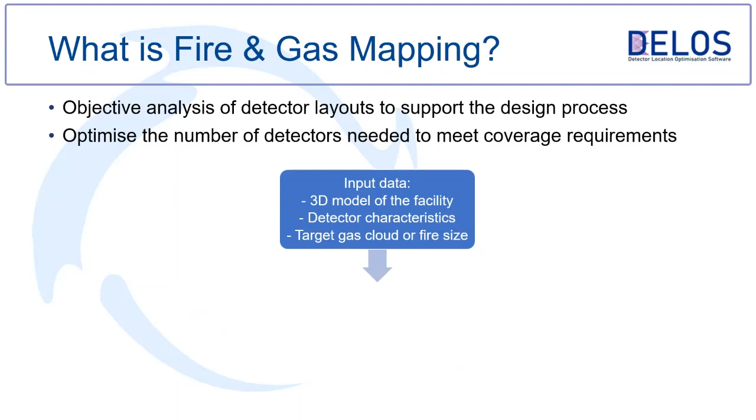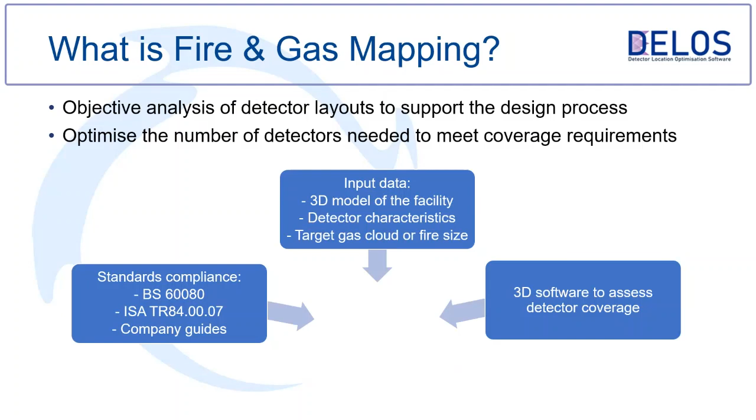In order to achieve that, there are components that need to come together. The first component obviously is the input data, which is your 3D model, detector characteristics, and also the fire or gas target that you want to detect. And then, for any compliance, you need a standard or guide for regulatory compliance. And then obviously you will need a 3D software which will do the work, and at the end of the day, have an informed design.

So that takes us to our software, DELOS, which is an acronym for Detector Location Optimization Software. It's something that we started in 2013 in response to client requirements. We'd been approached by clients to do 3D mapping for their platforms, and at that time there was limited suitable product in the market, so we decided to develop the tool.

It was designed to model fire and gas detection within a 3D geometry and calculate the output coverage statistics for each area. From 2013 onward, we have deployed it on several projects, both onshore and offshore, and as we gained experience, the software was updated to reflect that. In 2020, given the advances in technology, we upgraded the software, increasing its capability and features and improving the user interface. It has been available for purchase since 2021.

So the upgrade has taken into account previous experience from a wide range of projects that we've carried out, and also feedback from both the consultants using the software and the customers we work with. At the end of the day, what you have is software which is very quick to get started, very easy and intuitive to use, and also efficient and practical.

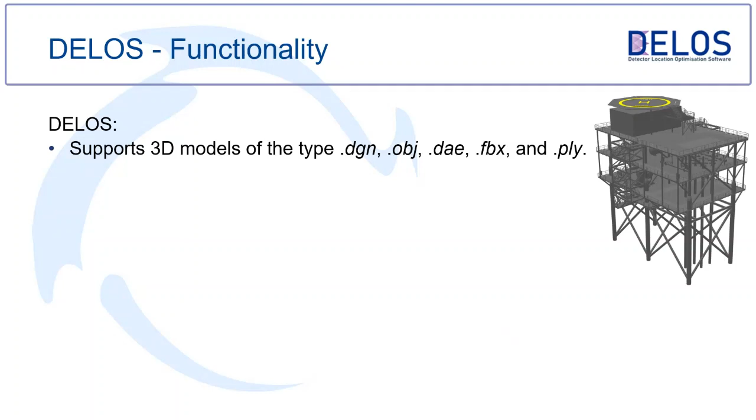The software supports different 3D model types, including DGN, DAE, and so on, and it enables different detectors to be modeled: flame detectors, point detectors, line of sight. The good thing is that with some software, you need a different file for flame detection and a different file for point gas detection. With this one, you can put all your detectors in one file, turn off flame detectors and do your gas detection analysis, then turn off gas detection, turn flame detection back on and do your flame detection analysis. So it's better that way.

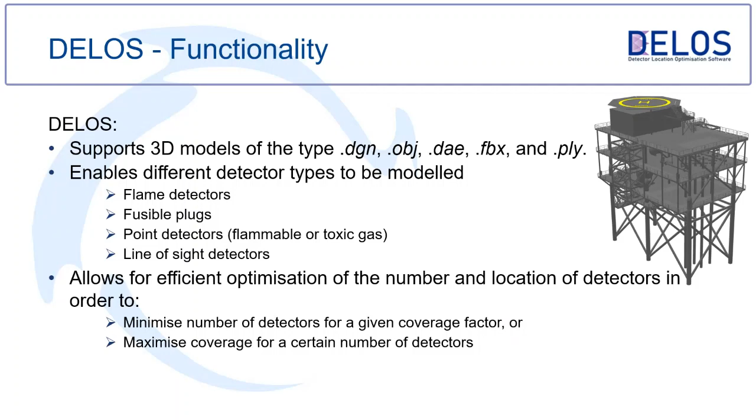At the end of the day, what the end user really wants is software that maximizes the coverage for a certain number of detectors and ensures you use the appropriate number of detectors. You don't want to overpopulate your platform with unnecessary detectors. The main features of the software are on the screen, but I'll pick a few of them to elaborate on.

One very important one from our point of view is live 3D rendering. Traditionally, when you place a detector, you wouldn't know whether the location is optimal. You have to run the model and check, or move it a bit and run it again. With live 3D rendering, you can see on the fly. You place a detector, turn on the obstructed view, which shows what the detector sees with all the obstructions in place, and as you move the detector around, it tells you whether the coverage is optimal or better than the previous location. That helps reduce the number of reruns, especially for a complex model.

Also, we have customizable detector properties. It allows you to customize your detectors depending on your criteria, and to have multiple detectors from different vendors, so you can run your model using those different detectors and see which one gives better coverage. Sometimes the client won't have a particular detector in mind, so you can try different ones and choose the best.

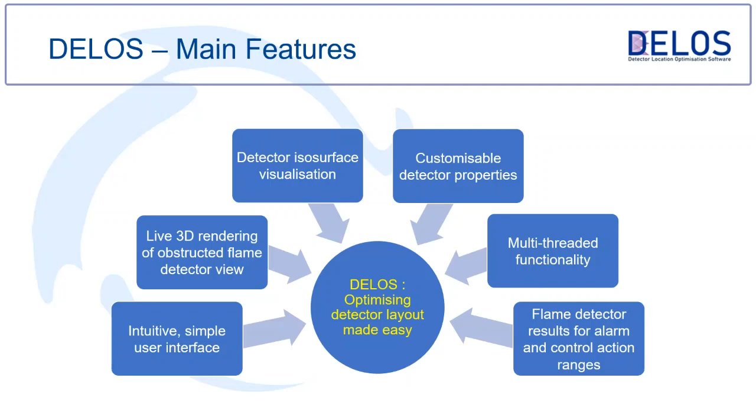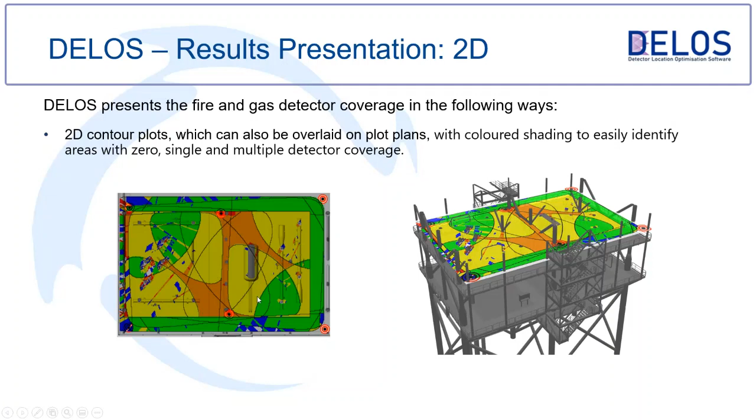And what you end up having, in terms of results, is you can have 2D results in contours like this, which show you the coverage provided by each detector. So this one is the coverage for alarm, and then there is a coverage for control action, and then the interaction between different detectors as well.

And also you can have your results in 3D on an ISO surface, which shows you whether you have single detector coverage, multiple detector coverage, or zero detector coverage. And obviously there is detailed statistics reporting either for your area of interest or for individual detectors. You can see how each individual detector is contributing towards the coverage, and you can see the overall coverage of your area of interest.

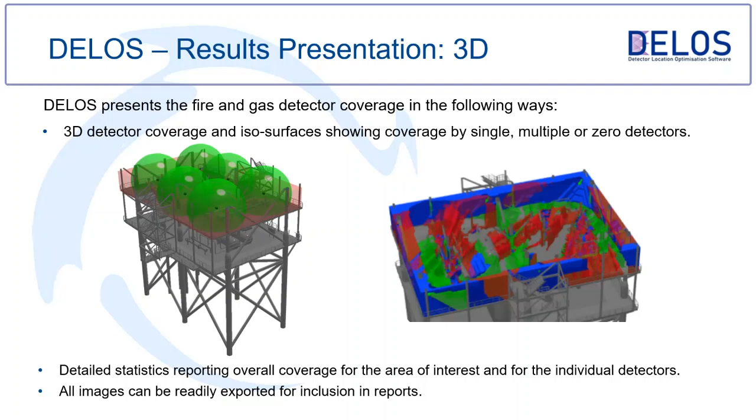And then all the images can be readily exported. The statistics and the images can all be readily exported to your reports. That is the end of this brief presentation from me.

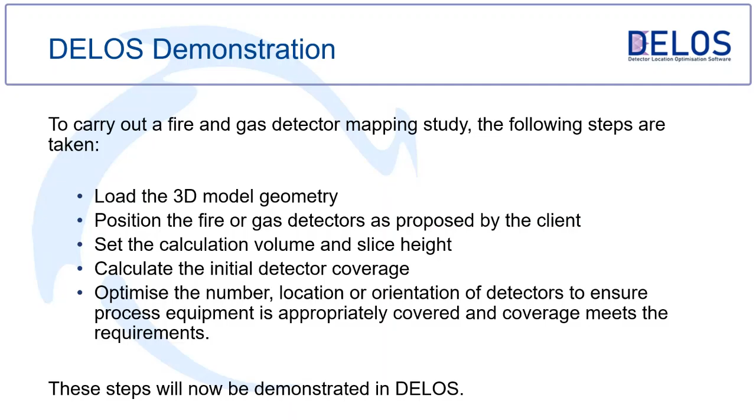So now for the next 20 minutes or so, I'm going to run through a live demonstration and show how easily DELOS can be set up for fire and gas mapping scenarios. So I'm just going to share my screen, and hopefully everyone can see my screen with the DELOS app open. Yes, you can see. Okay, good.

So first of all, I'm going to load a geometry. This is done by selecting Load Geometry from the File menu at the top and navigating to the 3D model that you want to use. As mentioned earlier, DELOS can load several different file types. For this webinar, we're going to look at an offshore platform.

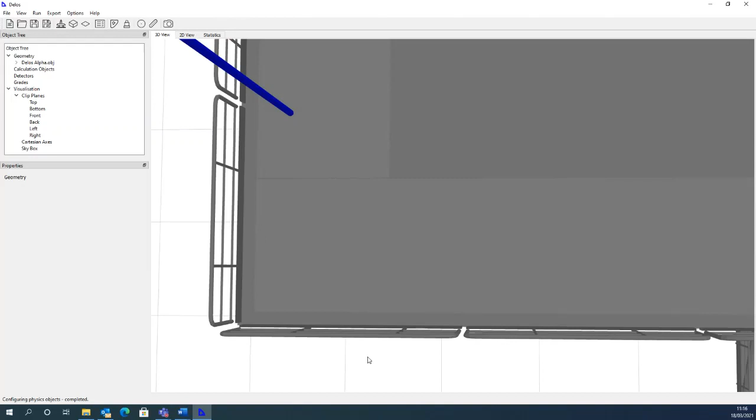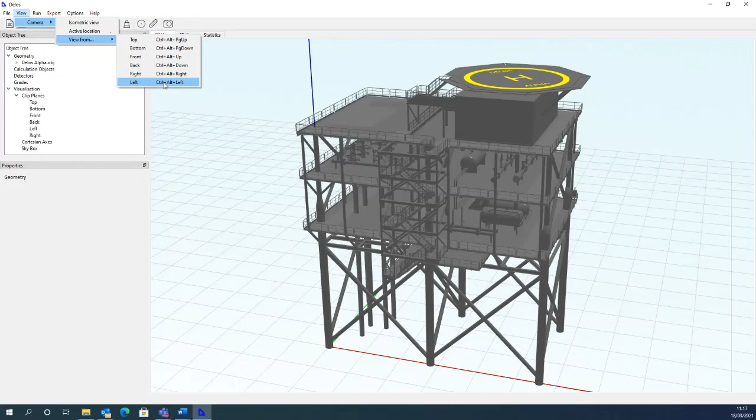There it is. It's very easy to navigate around the model in DELOS. You can zoom in and out using the scroll button on your mouse, and you can orbit around the model using the central mouse button. The axis lines indicate the origin point of the 3D model, in this case the jacket leg here on the left. There are also viewing options in the View menu at the top, and you can select the camera angle that you would like to view from. There's some options here. This can be really useful if you get disorientated when looking at a large model. It just brings you back to a point that you're familiar with.

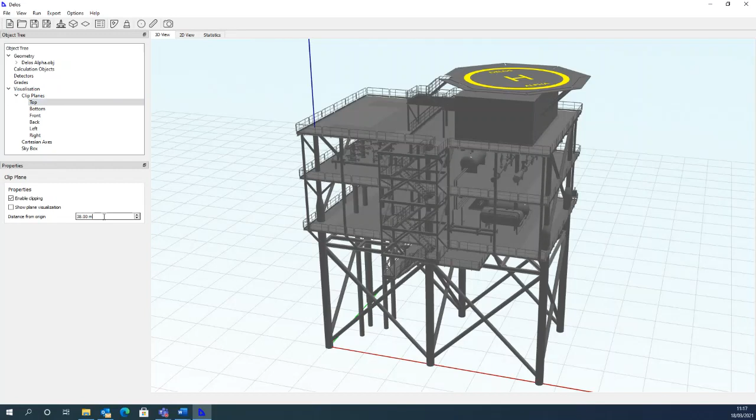The fire and gas detection provided on each platform deck would normally be assessed separately. So if we want to look at the main deck, it's very easy to clip the model using the visualization tool here on the left. By using the top clipping plane, I can incrementally clip away the top deck and navigate to the deck I'm interested in. And there's the main deck.

To increase the visibility, if you have a very congested platform, or if you're only looking at part of a deck, it can be helpful to clip away from the sides as well. But sometimes it's useful to keep structural features such as the stairwells here, just to aid navigation around the model. Using the clipping plane doesn't remove the geometry from the physics engine, it's just purely to help with the visualization.

So now we can have a look at the detectors. If I select Detectors in the object tree on the left, it opens the detector properties below. Different flame and gas detector types can be specified within DELOS, with properties such as the field of view and the range modified to suit the particular detector. So there are a couple of default styles already set up. I'll just give this one a name.

And then looking at the main deck, which is open between the well bay and the process area, forming one fire zone, I'm going to start with 2 flame detectors. So I can just zoom into my model, and then if I click on the support beam over here where I'd like my flame detector to be located, and then choose the icon in the top toolbar, there's my flame detector added in that location on the model.

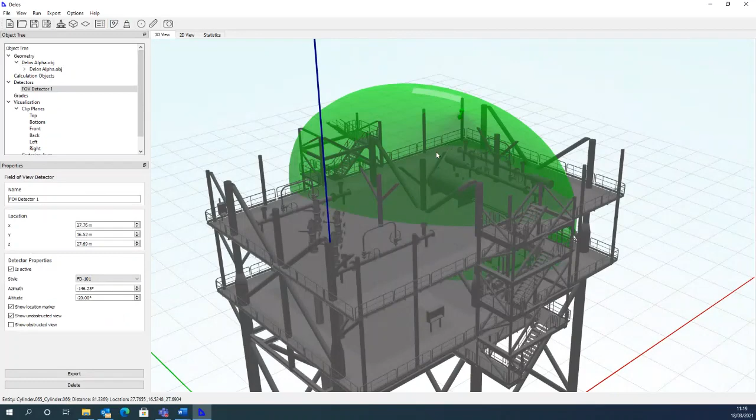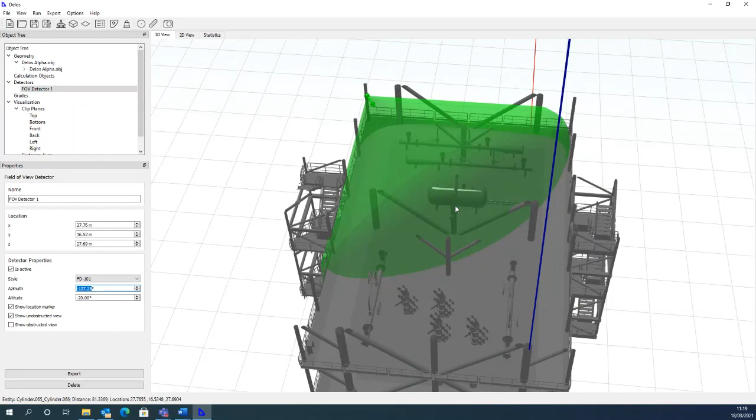And I can adjust the location using these options on the left. The unobstructed field of view is shown in green here, and I'm just going to swing the angle around a little just to cover the area. I can also look at the obstructed view just using this tick box here over on the left, and this gives an immediate idea of how good the detector coverage is.

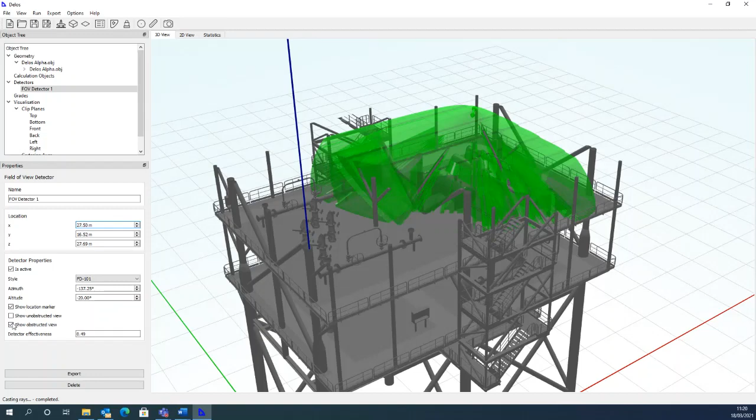And I can move the detector around, and the obstructed view is generated live, which for a very congested model immediately helps with optimizing the detector location. So I'm just going to pop that one back and just move it slightly away from the support beam. So I can turn off my obstructed view, and I'm going to spin my model around and choose a location here on the opposite side to add a second flame detector.

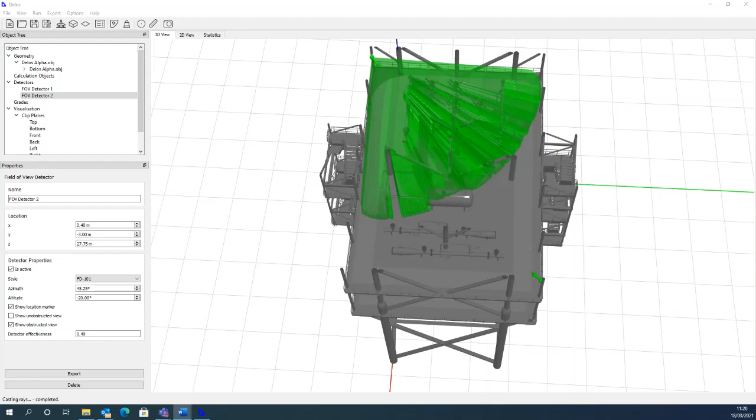And as from before, if I just zoom out and look from above, I can quite easily adjust the angle of the detector to bring it around and cover my well bay area. And again, I'm just going to move it slightly away. And I can also just check the obstructed view and make sure there's nothing immediately obviously blocking my detector. And again, I'm just going to turn off the view just to keep my model clear while I continue setting up the scenario.

So now I need to set the calculation boundaries, and I'm going to add a calculation volume by first clicking on the approximate midpoint of the deck and then selecting this box icon at the top. The calculation volume specifies the boundaries that the calculations will be performed for, and only detectors located within this volume will be taken into account. The volume can be sized using the dimension fields over here on the left, so I'm just going to increase it just to fill my main deck area and just reduce the height.

The location of the volume is based on its midpoint, so I'm just going to make sure these are in the center and just reduce the height. And I can see that my calculation volume is sitting nicely on my main deck. And I can just use this tick box just to hide that from view as well.

So the next step I'm going to do is add a slice by using this icon at the top. The slice defines the height for the 2D results, and as for the calculation volume, I can just modify the dimensions over here with these fields. And again, I'm just going to adjust for the center point. Multiple slices can be added if the coverage results are needed for different height levels, but I'm just going to use one slice for this analysis.

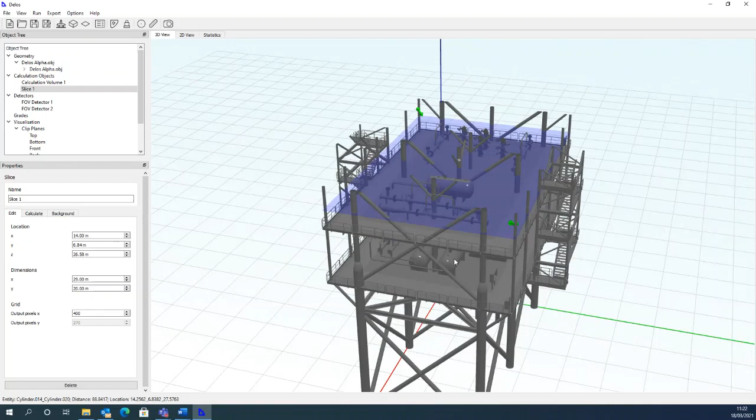So now the slice is defined, I'm going to add a background image. This is really useful for showing the results as a 2D image on a plot plan or a fire and gas detector layout drawing. So to add a background image, I just select the tab here and then just click on the 3 dots and navigate to my plot plan. And the image can be seen by selecting the 2D view tab just here.

It's important to link the background image to the 3D model so that the results are aligned and plotted correctly on the background image. And this is done simply by setting the scale and the origin using the button down here on the lower right. So the scale is set by drawing a line. I normally choose between 2 jacket legs because the distance between those is usually quite easy to find on a plot plan.

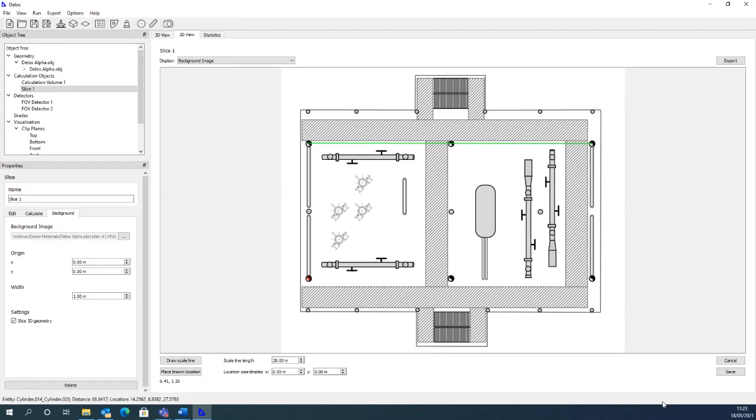So I just click on the Draw Scale Line button here and then click on my first jacket leg, carry the line across to my second one and click again, and the line turns green, and I can just enter the distance here in the scale line length box. And then the origin is fixed by placing a known location using this button, and I know this jacket leg is my origin, which has coordinates 0, 0, and I can just click Save over here. And now my 2D image is linked with my 3D model.

If you're following a standard or guidance that uses graded areas for your flame detector coverage, for example, having higher risk zones around process equipment with a lower risk buffer, these can also be added easily to the model, and the calculations will take into account the detection ranges for the grades and provide the coverage results accordingly.

So first, to define the graded areas to be included, if I select grades here in the object tree, this opens the properties below, and the graded areas can be defined with ranges added, depending on the size of the fire that needs to be detected within each area. So I've already set up a medium and a low risk graded area, and they've got ranges for alarm and control action.

So to add a graded area to the main deck, I select this icon at the top, Add Graded Area, and then this opens the graded area property view down below. So I can give my area a name. I'll just call this one medium risk, and I can select the grade type from this drop-down menu.

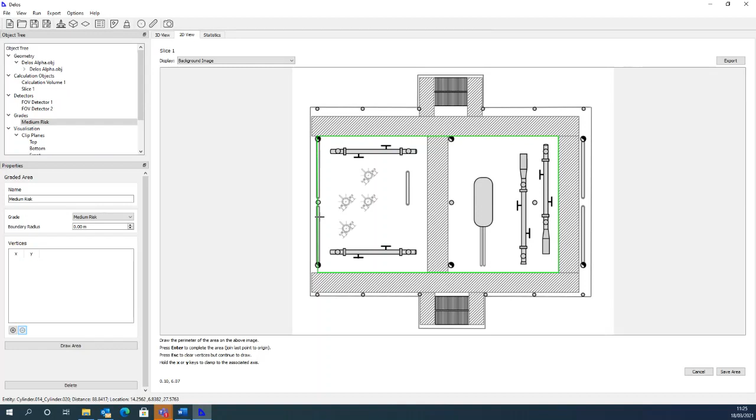To define the area on the model, I can either type in the coordinates by adding points here in this table, or I can choose to draw the area by selecting this button here, and that takes you to the 2D view. So now I can draw my graded area. I just click the corners where I want my medium risk area to be. And the outline in green there shows my medium risk graded area. So once I click on Save, the coordinates are automatically entered in the table over here.

If I want to add a lower risk buffer area around this, I can simply add another graded area. Again, I'll just give this one a name. This will be my low risk area, and it's defined as the low risk type here. I can add a boundary. I'll use 3 meters, and then I can just copy the coordinates from my medium risk into my low risk, and that defines that area.

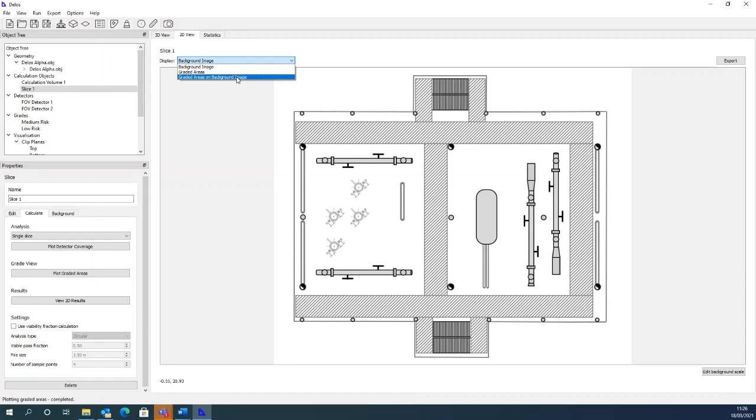To check that they're how I want them to be, if I go to my slice, I can choose Plot Graded Areas and then select it from the drop-down menu. And there I can see I've got my green medium risk area with my blue buffer around it. So if you're not using graded areas, this step can just be missed altogether.

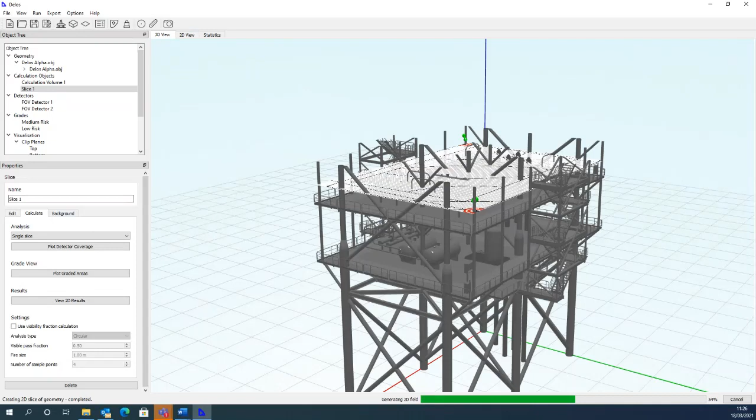And now we can look at plotting the detector coverage, which can be done either clicking on this button here, or there is a Run menu at the top. So in the background, DELOS is now performing hundreds of thousands, possibly millions of raycasts to determine the visible volume. DELOS contains a number of calculation options to account for factors such as the fraction of a fire visible and composite images across multiple layers. Here we're using a standard visible volume approach.

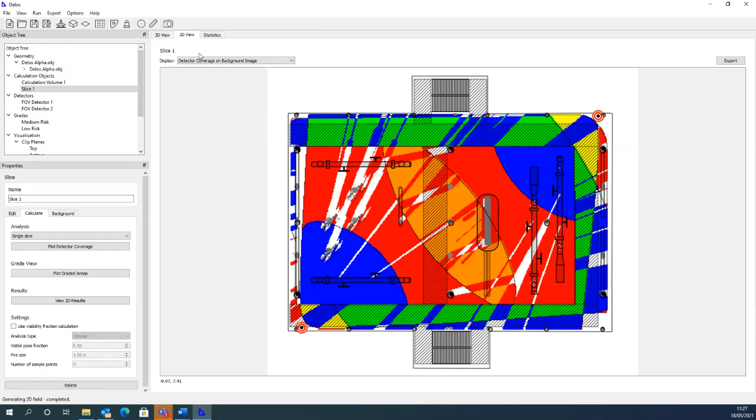So here we can see the coverage results are shown on my slice in the 3D model, or I can go to my 2D view tab and select from the drop-down menu to see the detector coverage on the background image. And the blue area represents a single detector coverage for alarm, the red is showing coverage for control action, and then the orange overlap in the middle shows coverage for 2 detectors for control action. There's also a statistics tab which summarises the detector coverage for alarm and control ranges for both the medium and the low risk graded areas.

It's also possible to view 3D results on the 3D view tab. Isosurfaces can be plotted showing the coverage for different numbers of detectors, and this option is within the calculation volume and the calculate tab. So from the drop-down menu, I can choose whether to plot the detector coverage, which gives a 3D version of the results we've just seen on the 2D slice, or I can specify the number of detectors to plot the coverage for.

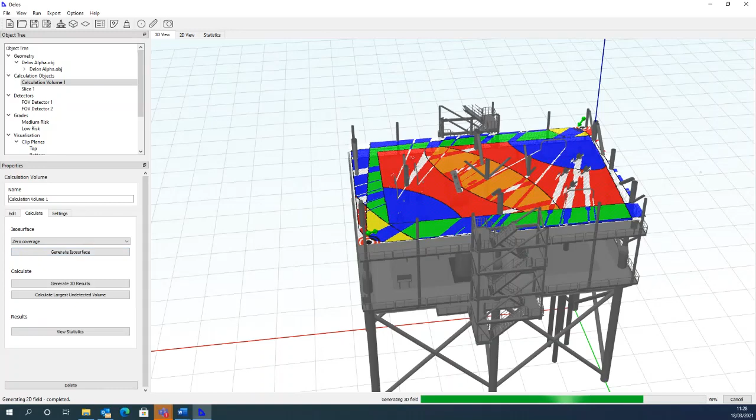If I select 0 coverage and then generate isosurface, DELOS will present the volumes within the module where there's no detector coverage. And this can be really useful in helping improvements to the detector layout to be focused in the appropriate places. So I'm just going to hide the slice and brighten up the colour of the isosurface a little to make it easier to see. And now we can clearly see which parts of the deck are not well covered by the existing detectors. All the red is showing 0 coverage.

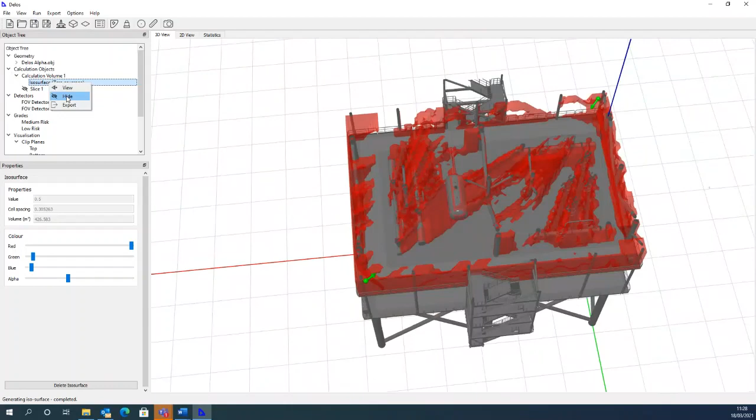So I'm going to add a couple more detectors. I'll just hide that isosurface. So again, I'm just going to zoom into my model and just select a beam here to add a flame detector. And again, if I look from above, I can just swing the angle round a little, and I'm going to move it a little bit that way too, and just take it away from the structure there of the stairwell.

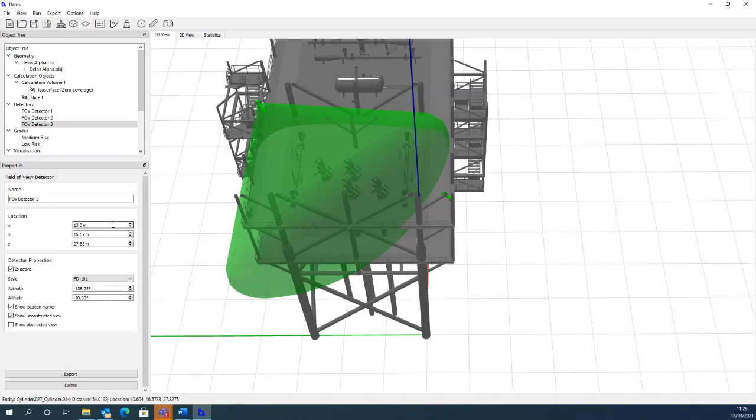And I can just check using the unobstructed view that my detector has a good view out across the area. So I'm going to just spin the model around and add another detector over here on this beam.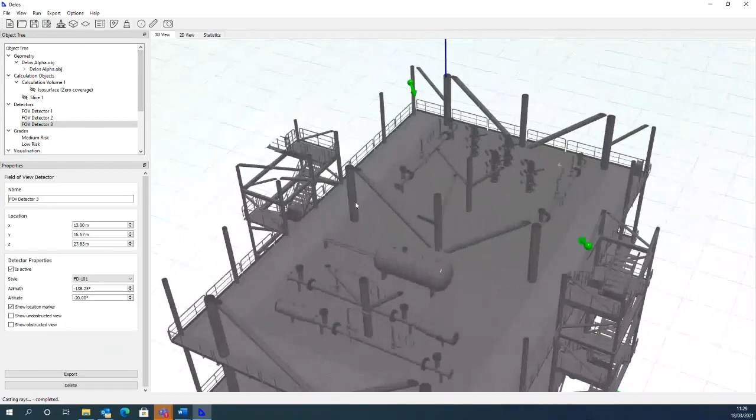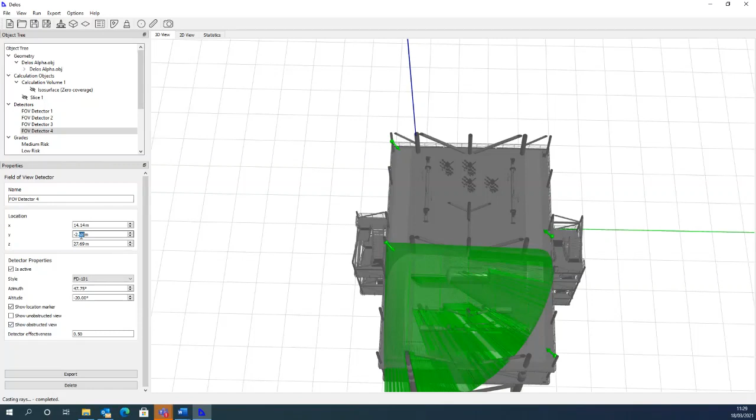And again, I can just easily adjust the angle around a little, and I can check the obstructed view just to make sure that it's not too close to the staircase. I'll just move it a little bit away from the structure. There we go. So now I can run the detector coverage plot again, and hopefully we'll see much improved coverage.

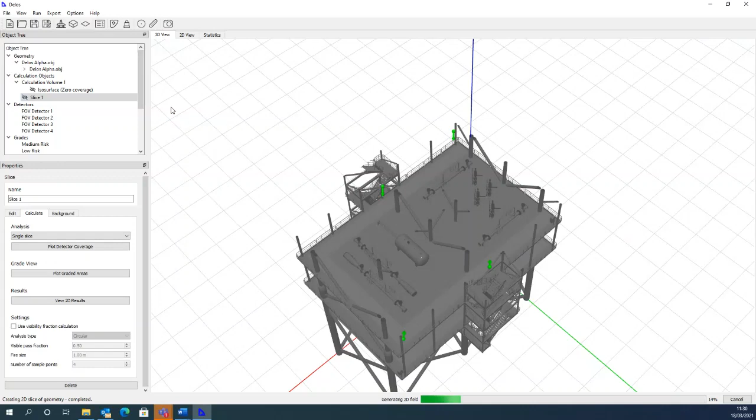I'm running DELOS on a laptop at home. My laptop's 5 or 6 years old, so it's not the fastest machine, but the DELOS calculations don't take very long at all, and the results are soon shown. It's going to show the slice, and there we can see the outline of the detectors is already coming up. And now we have our final plot.

And again, looking on the 2D view, we can see that the coverage is significantly better, with most of the module now being covered by 2 detectors. So if I go back and run another isosurface, we should be able to see that the volume showing 0 coverage is much less than it was before.

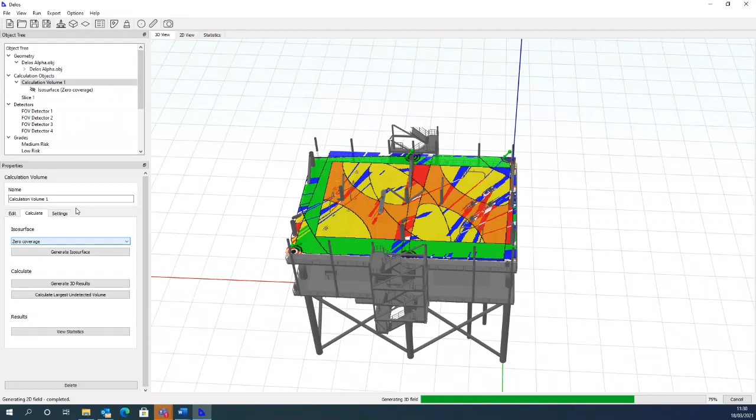Again, I'm going to just hide the slice just to make it easier to see, and we'll show the original isosurface and just brighten up the colour of this one a little. So we can see now the blue area, or the blue volume, is showing the parts of the deck where there's 0 coverage, which is much less than it was before.

So all these images can be readily exported from DELOS to put into reports simply by using the camera icon here at the top, or on the 2D view tab, there's also an export button. So we've had a look at flame detectors. Now I'm going to quickly run through gas detection.

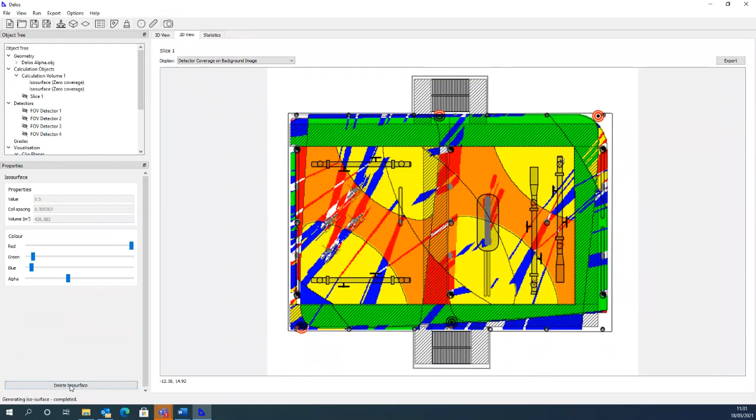First, I'm just going to turn off the flame detectors so that we don't get any confused results. And I'll just remove the graded areas that we don't need anymore. And if we go to the 3D view, we'll just hide these isosurfaces too, just to keep the view nice and clear. So adding gas detectors to the model is very similar to adding flame detectors. I'm just going to do this from above. It's quite easy to see.

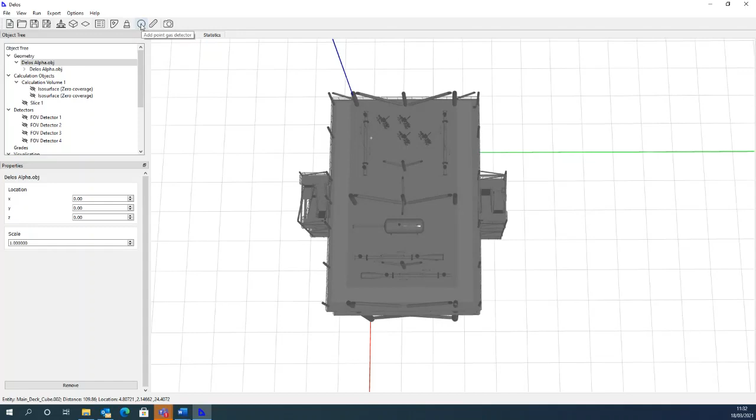So I just click on the model in the location where I want my gas detector to be, and then choose the point gas detector icon in the top toolbar. And that places the gas detector on the model in that location. The position and the height of the detectors can be tweaked using the options over here on the left. Now I'm just going to quickly run through and add a grid of 6 detectors. Just going down through here.

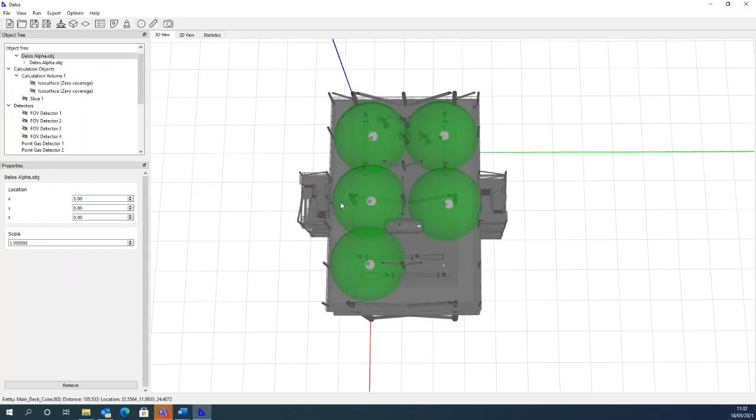And if I just look from the side, I can see that all my detectors are on the deck level, which is not where we want them to be. So I can just select them all and increase the height. And then I can just go to my slice and choose the plot detector coverage, just like before. And if I show the slice and go to the 2D view tab, we can see there's our gas detectors. And the calculation's just finishing running, calculating the coverage.

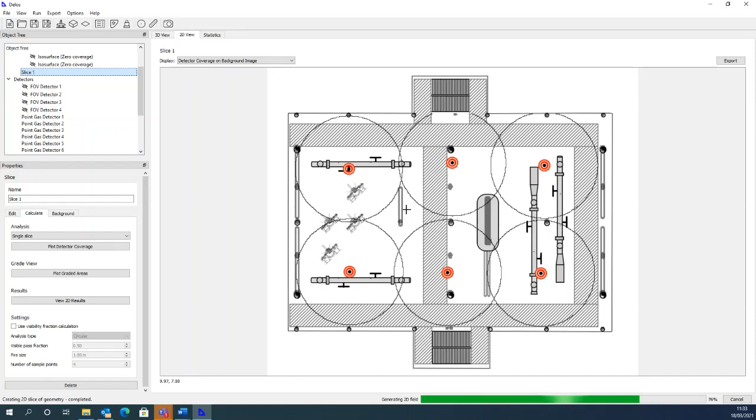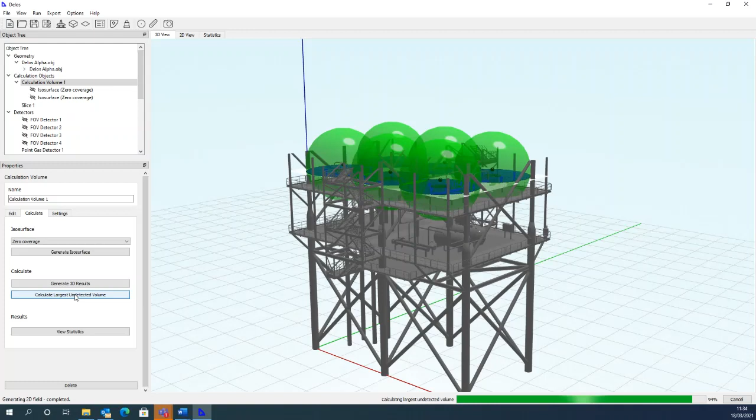And this looks at the largest volume which cannot be detected by any detectors. If the undetected volume is above a certain size, this implies that if ignited, it could generate overpressures above a threshold, which is something we want to avoid. So the calculation is just finishing, and here we can see with this orange sphere the location of the largest undetected gas cloud. And if I just have a look here on the left, it gives me the volume and the location. So that's a quick look at the gas detection.

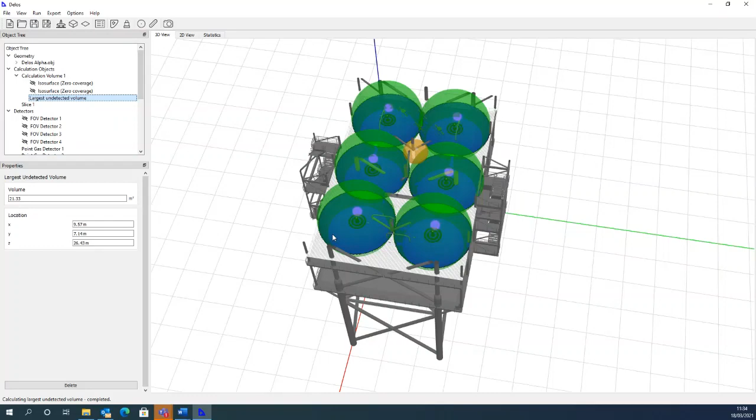And just to summarize, we have loaded the model geometry, placed flame and gas detectors, set the calculation volume and the slice height, defined graded areas, and generated 2D and 3D results, which is a quick overview of how you would set up a project from start to finish in DELOS. Hopefully this has provided a flavour of some of what DELOS can do.

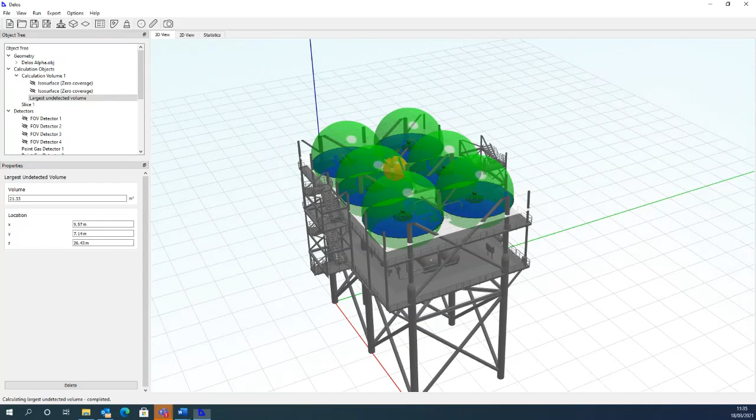Let me know if you can see my screen. Yes, we can see your screen. Okay, that's good. So there is just one or two slides really outstanding.

So in summary, the DELOS key benefits, which we are very happy with: one, it's been tried and tested. We have used it and verified it on a very wide range of studies and projects since 2013. It is intuitive and easy to use, really. I always think of Google when I open it, and the aim really is to reduce as much as possible any cost that engineers will have to bear in order to get up to speed on using the software. And finally, it's cost effective; it's very quick and efficient to use to get your results, as Lorna has shown.